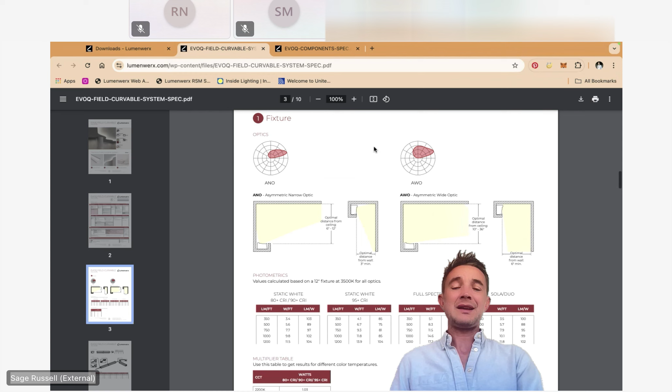And that's the step - for reference, I'll toggle real quick over to the Lumenwerx website. If you look up the Evoq family, you are going to find individual cut sheets, installation instructions, photometry, and brochures exactly where you would expect them to be. You can also email me or Sarah or anyone at the systems team, or click on QR codes, and probably get to the same stuff. I also pulled up 2 cut sheets so you can see how we approach this stuff fairly concisely and hopefully with enough information to make it crystal clear. But if not, reach out to us as always.

So back to the show. Cove lighting - most of this is just going to be glamour shots of how we think you should be applying it. But let's talk about what the family actually offers. The base, of course, is the light module itself. Hopefully you get some representation of it from me holding it up in cyberspace. It's a nominally 1.5 inch by 2.5 inch optical element that importantly has all the electronics on board.

It is a line voltage plug and play quick connect light module. There are no remote drivers for Evoq, there are no remote electronics. The simple plug and play module allows you to handle a number of dimming inputs and simply get light out of it. I highlighted in green things I wanted to remind myself in case I forget to say: module sizes are 12, 18, and 48 inch. Turns out that more or less covers you. You can then specify exact length systems down to the foot or even 6 inch increments, and long runs.

Evoq modules all have a retractable 2 or 3 inch tether cord that allows some amount of give, so you can stretch out Evoq modules to meet exact lengths, deal with inconsistencies in the Cove, or deal with outright curves in a curved application.

That draws on one of its key features: what happens when you have a gap between Cove Evoq modules? The answer is not much. The optic in Evoq is so sophisticated that it will create uniform lighting almost no matter what. That's the real goal, to accommodate for potential shortfalls or errors in the Cove, spaces, gaps, or curves, and still create uniform, predictable, indirect illuminance from the Evoq system.

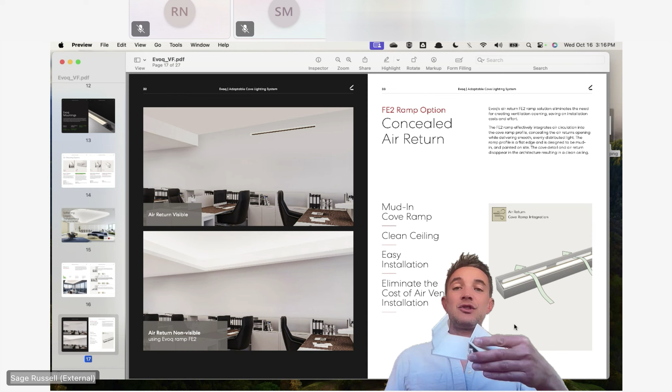And then, of course, the world famous field-curvable ramp profile, which we'll touch on later. From there, it's just a matter of figuring out and putting it all together. There's some cross sections of the different ramp profiles or cove profiles. Worth noting that, like so much of our aluminum, we finish all this in-house, so we can control where power entry points are, customize those cove profiles, and machine out different elements. One very common one is air return capability, so your Evoq cove can be designed to accommodate air return duties.

In addition to straight profiles, of which we have a bunch, we can also curve profiles. Anyone who's a fan of the brand or been back to the factory has seen the Bend-O-Matics, the bending machines, in action. On call, if you give us geometry, we can create factory curved profiles to accommodate the Evoq family. That's something you might ask for in the case of curved architecture, where you want the cove to match that architecture.

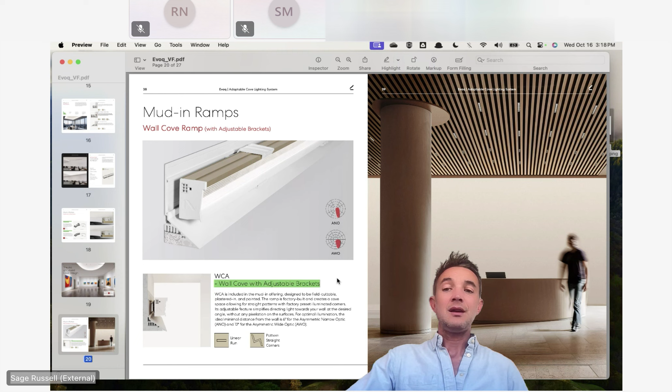As promised, towards the end of this, we'll talk field-curvable as well. Lovely gallery concept, worth mentioning this all applies to vertical cove lighting too. With pure indirect, we make a number of profiles that interface with the wall and allow you to provide that same amount of pure indirect, very deep forward throw light onto vertical surfaces.

From here, the drywall contractor does the vast majority of this work, hardwaring on, slapping on this mud capturing face, and then finishing it all up with architectural grade plaster mud skim coating. And like any other successfully deployed cove application, the Evoq module simply drops into that cove.

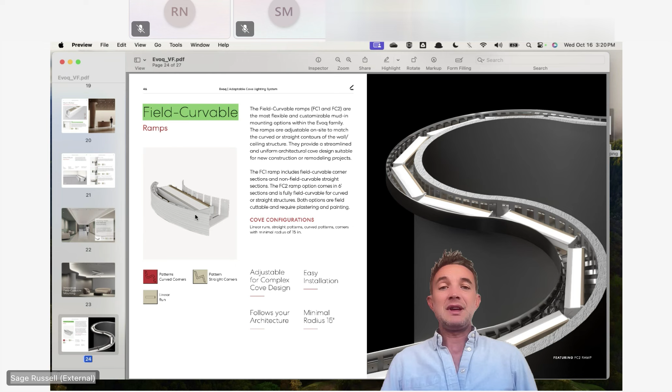So you bring all that together, and that is the spec, right? You figure out what you need from the light engine, figure out the depth of your cove application, then you start talking geometry and communicating that to us, from straight to curved to field curvable.

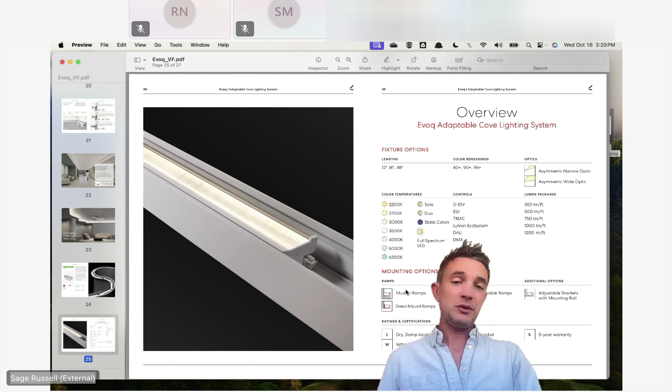Different degrees of mud and ramps, and any specialty features. The cut sheets echo most of that and make it a fairly simple process. But again, we really welcome the opportunity to mock this up or run calculations for you and show you exactly what Evoq can do in your specific geometry situation.

I'm a big fan. I think we really got something here. But that's no surprise because I work for Lumenwerx. But I also have high regard for our optical engineers, and any product family that really hinges on optical performance, I would like to think we have a good shot at bringing something unique and innovative and best in its class to market. From there, I will, as promised, pull up these cut sheets so you can see what they look like, and invite you to reach out to myself or anyone at the lighting systems team.

And we will get you off and running with Evoq. I'll open it up to questions since we have a few minutes left. Wonderful, thank you so much, Sage. We do have some questions. I do see things about an adjustable bracket.

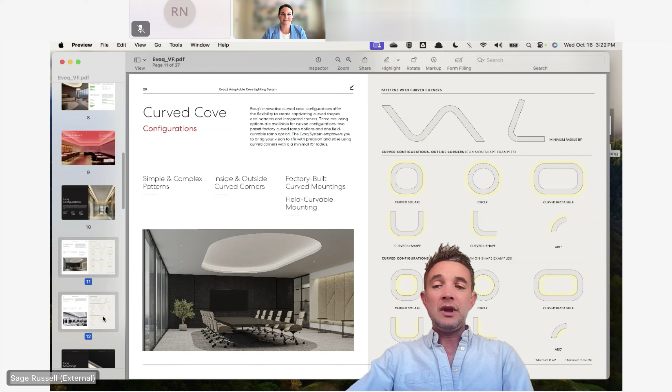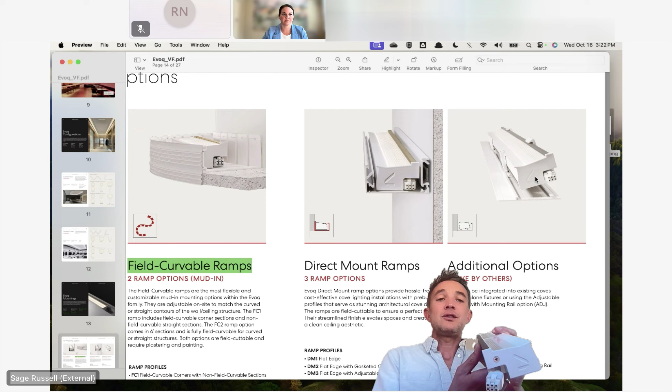What is that for? Yeah, we didn't talk too much about it, so let's circle back. Evoq, as promised, the optic is intended to be predictable, successful, nearly foolproof in all traditional Cove applications. But if, like me, you are a control freak and don't trust anyone, that's fine, we can accommodate you. We do make this aiming adjustable positive lock bracket. This is simply a ramp or profile that can be fit into our other profiles, onto a contractor-built Cove, or onto other architecture, and allow you positive click into place aiming so that you can uniformly tilt the deployment of Evoq light. I see this being used primarily in sloped ceiling applications, maybe barrel vaulted applications where you just can't be sure and want some latitude in where that peak candela from the Evoq forward throw distribution lands.

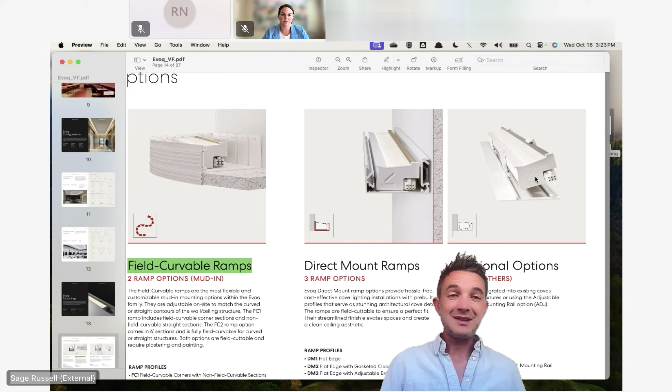Can we pre-ship the Cove portion and the modules later? Absolutely, and that's a great strength, and I highly recommend doing it when and where you can. I think it's safe to say that Evoq ramp profiles and the Evoq module are two different trades operating at two different times, if you're lucky. In my perfect world, a drywall contractor goes in and lays up Evoq Cove product or ramp product or profile product and walks off the job, mud done, everything looking architecturally fine. And your electrical contractor comes back on site, maybe the material is shipped separately so it doesn't sit around on a shelf or in a truck somewhere, and that contractor's day consists entirely of taking Evoq modules, plugging them into one another, and laying them into an already established Cove.

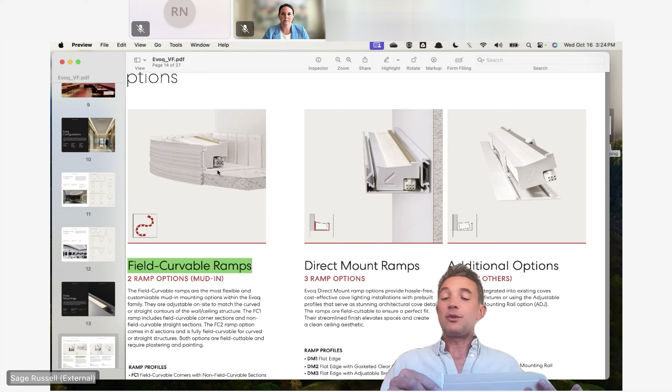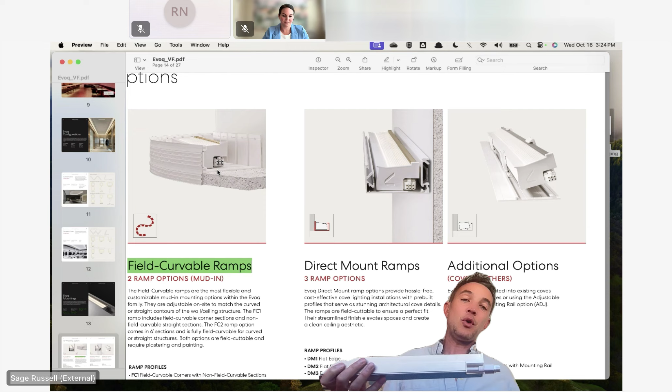So yes, and please do. Just to confirm, there are no remote drivers for the Evoq system? Yeah, that's right. A good example, you might not be able to tell, but this is a line voltage AC 5-con SO cable directly from a plug to a fixture. Worth noting that the only limitation to length is the voltage and current limitations of your conductor. All that to say, a single line voltage power feed to Evoq, plug and play, no remote drivers. You might be able to power 60, 80, 100 feet of Evoq from a single line voltage power feed. No remote drivers in Evoq, electronics are all in the light module.

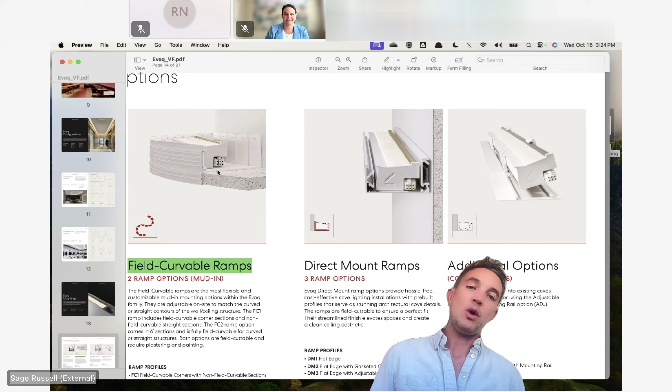All right, one more quick question. Are these exterior grade, or do you have an exterior grade product? Good question. They are IP44, UL damp rated, so suitable for exterior undercover, depending on your authority having jurisdiction or IOR, inspector of record. They are intended for interior use, they aren't going to do well in standing water. If you need to use Evoq in an exterior situation, let's take it case by case. It may be code compliant, which is to say electrically safe, but of course at Lumenwerx we care about success and durability. So it's going to have to do with your individual environment, bugs, sideways rain, frost, cold, vandals, all that stuff. Again, code compliant, UL damp, suitable for exterior undercover, but I would say let's talk and make sure we've got all our bases covered.